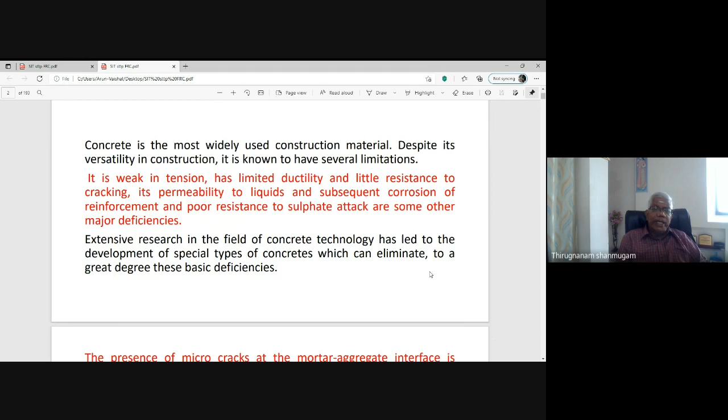So extensive research in the field of concrete technology has led to the development of special types of concretes which can eliminate to a great degree these basic deficiencies.

The presence of micro cracks at the mortar-aggregate interface is responsible for the inherent weakness of plain concrete. This weakness can be improved or arrested by the inclusion of fibers in the mix. The fibers help to transfer the loads at the internal micro cracks. Such a concrete is known as fiber reinforced concrete.

Thus, fiber reinforced concrete is a composite material essentially consisting of conventional concrete reinforced by fine fibers, either steel fiber or non-metallic fibers. The fibers suitable for reinforcing concrete have been produced from steel, glass, and organic polymers. Fibers are available in different sizes and shapes.

Fiber reinforced concrete is a two-phase composite material in which a cement-based matrix is reinforced with an ordered or random distribution of fibers. Regarding the orientation of fibers, they may be orderly distributed or randomly distributed. If orderly distributed, there is a special name for the fiber reinforced concrete, such as SIFCON, SIMCON, etc. If randomly distributed, it is given the general name fiber reinforced concrete.

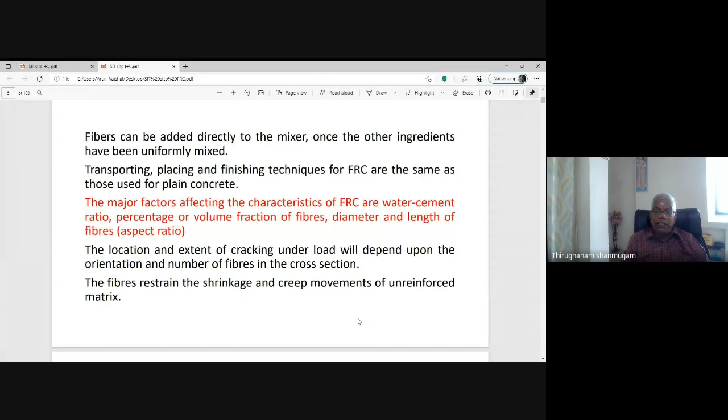The location and the extent of cracking under load will depend upon the orientation and number of fibers in the cross section. The fibers restrain the shrinkage and creep movements of the unreinforced matrix.

Polypropylene fibers and glass fibers are synthetic fibers, or non-metallic fibers.

In contrast to reinforcing bars in RCC, reinforced concrete, which are continuous and carefully placed in the structure to optimize their performance, the fibers are discontinuous and are generally randomly distributed throughout the matrix. As a result, the reinforcing performance of steel fiber is inferior to that of reinforcing bar.

Just think about this point. The reinforcing bars are continuous bars; that is, the reinforcement is continuous over a length of about 2 meters or 4 meters, depending upon the length of the member. It is carefully placed in the structure in the tension zone. Normally, the steel reinforcement is used to take care of the tensile stresses, so wherever tensile stresses are occurring, you have to place the steel reinforcement.

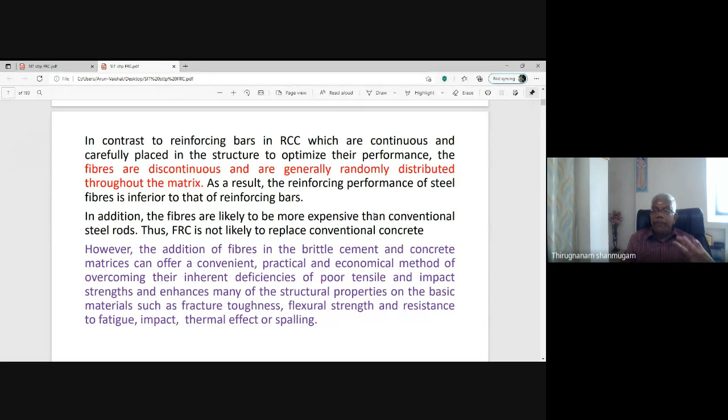However, the addition of fibers in the brittle cement and concrete matrices can offer a convenient, practical, and economical method of overcoming their inherent deficiencies of poor tensile and poor impact strength, and enhances many structural properties of the basic material such as fracture toughness, flexural strength, resistance to fatigue, resistance to impact, and resistance to thermal stresses or spalling of the concrete. These are the properties to be improved by means of the inclusion of fibers.

Essentially, fibers act as a crack arrestor, restricting the development of cracks, thus transforming an inherently brittle matrix, that is cement, with its low tensile strength and low impact strength, into a strong composite with superior crack resistance, improved ductility, and distinctive post-cracking behavior prior to failure.

When you examine the behavior of FRC beams and compare it with the behavior of RCC beams, the distinction is that the post-cracking behavior of the fiber-reinforced concrete beam is significantly different from the behavior of the RCC beam.

Steel fibers are probably best suited for structural application, due to superior properties like increased tensile and bending strength, improved ductility, resistance to cracking, high impact strength and toughness, and high energy absorption capacity. This fiber-reinforced concrete has found special applications in hydraulic structures, pavements, bridge decks, heavy-duty floors, and tunnel linings, etc.

Because of superior properties like improved ductility, improved resistance to cracking, high impact strength, high toughness, and high energy absorption capacity, this fiber-reinforced concrete has found special application in hydraulic structures, pavements, bridge decks, heavy-duty floors, tunnel linings, and structural elements subjected to seismic behavior.

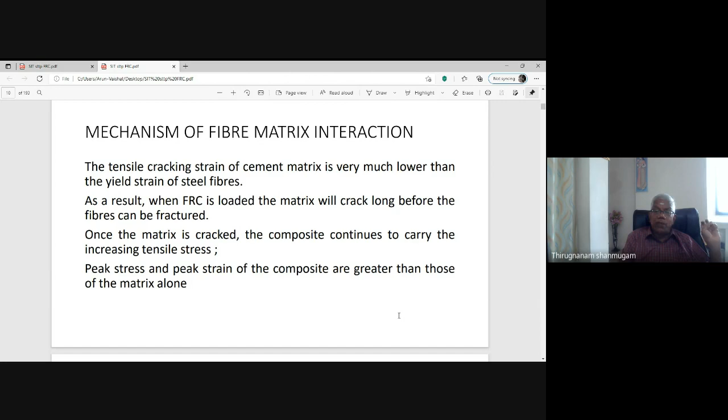The fibers are able to carry the tensile stresses, so the composite material continues to carry the increasing tensile stresses. The peak stress and peak strain of the composite are greater than those of the matrix alone. During the inelastic range between the first cracking and the peak,

multiple cracking of the matrix occurs. This is a significant behavior of fiber-reinforced concrete. There are a number of cracks developed in the load deflection curves. Because of these cracks, the load deflection curves exhibit multiple cracking mechanisms.

So until the initial cracking of the matrix, it is reasonable to assume that both the fibers and the matrix behave elastically and there is no slippage between the fibers and the matrix. Just like conventional reinforced concrete, we assume that the steel reinforcement is fully bonded with the cement concrete until the slippage occurs. Until then, this behavior is elastic behavior, and you can apply your strength of materials theory.

Once slipping occurs, all the tensile stresses from the cement concrete are transferred to the steel reinforcement. So the cement concrete is cracked in the tension phase and the tensile stresses are taken by the steel reinforcement. That is the behavior of RCC beams.

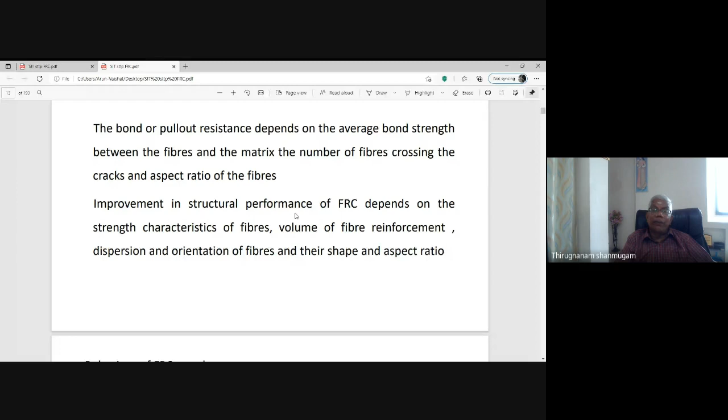Behavior of fiber reinforced concrete members: in an FRC member subjected to flexure, the load at the first crack will increase due to the crack arresting mechanism of the closely spaced fibers. After the concrete cracks in tension, the fibers continue to take the load, provided the bond is good.

When the fiber strain reaches its breaking strain, the fiber fractures, resulting in load transfer to the fibers of adjacent layers, which on reaching the breaking strain also fracture, resulting in shifting of the neutral axis. Fibers nearer to the tension face of the beam reach the failure strain first, and this extra strain is transferred to the fiber next to the surface fiber, that is, the interior fiber, causing the shifting of the neutral axis.

You can notice this behavior in the under-reinforced concrete beam. There are three types of behavior: balanced beam, under-reinforced, and over-reinforced. In a balanced beam, the critical neutral axis is at one point.

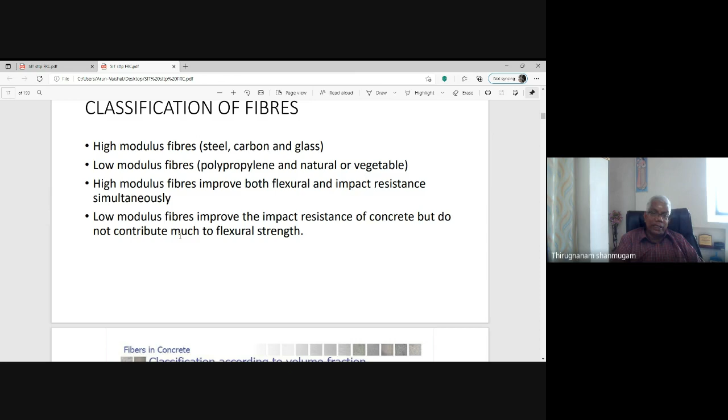Another classification is according to volume fraction: low, moderate, and high volume fraction. If the volume fraction is less than 1%, it is called low volume fraction. If greater than 2%, it is high volume fraction; in between is moderate volume fraction.

Low volume fraction means the fibers are used to reduce shrinkage stresses and shrinkage cracking. These fibers are used on surfaces of slabs and pavements that have large exposed surface area, leading to high shrinkage cracks. So the primary purpose of low volume fraction is to arrest shrinkage cracks developed on large exposed surfaces, such as roof slabs or pavements.

The dispersed fibers offer various advantages over steel bars and wire mesh for reducing shrinkage cracks. The fibers are uniformly distributed in 3 dimensions, X, Y, Z, making an efficient load distribution. The fibers are less sensitive to corrosion than reinforcing steel bars. A steel bar is continuous in length, so once corrosion takes place it continues over the entire length of the bar. But these fibers are randomly distributed within the cement matrix, so they are less sensitive to corrosion since continuity action will not be there. The fibers can also reduce the labor cost of placing bars and wire mesh.

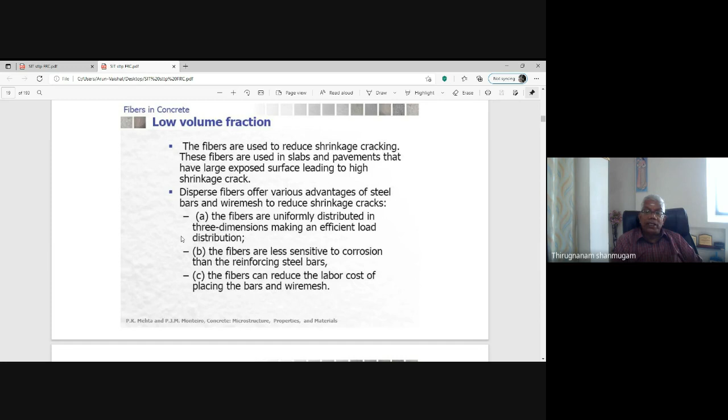Moderate volume fraction: the presence of fibers at this volume fraction increases the modulus of rupture, fracture toughness, and impact resistance. These composites are used in construction methods such as shotcrete, fiber shotcrete, and in structures that require energy absorption capability, improved capacity against delamination, spalling, and fatigue. So moderate volume fraction of steel fibers or other fibers can be applied as fiber shotcrete, used in lining of tunnels, etc.

Similarly, this moderate volume fraction is used in structures that require flexural behavior or seismic behavior, which demands ductility and energy absorption capacity, and improved capacity against delamination in aggressive environments, spalling of concrete, and fatigue strength, which is subjected to reversal of stresses.

High volume fraction: the fibers used at this level lead to strain hardening of the composite. Because of this improved behavior, these composites are often referred to as high performance fiber reinforced concrete, HPFRC. In the last decade, even better composites have been developed, referred to as ultra high performance fiber reinforced concrete, UHPFRC. Current research is focused on this high performance fiber reinforced concrete, normally high performance concrete, HPC.

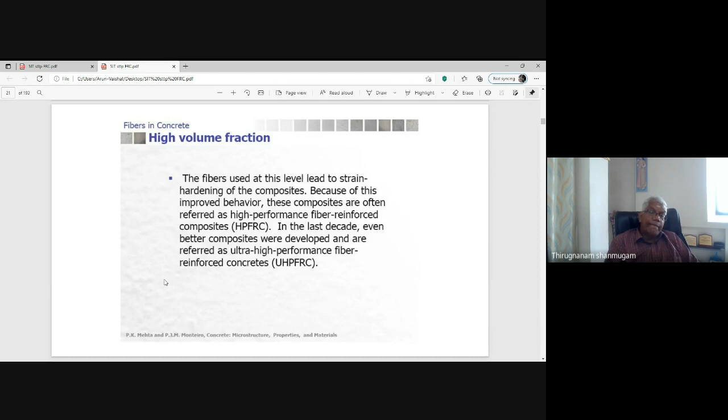This HPC is a brittle material. Because of the higher strength, sudden explosive failure takes place. So in order to convert this failure into a ductile failure, fibers are added inside the concrete. This resulting concrete is called high performance fiber reinforced concrete, which is applied in all field applications.

Mechanism: the composites carry increasing loads after the first cracking of the matrix. If the pull-out resistance of the fibers at the first crack is greater than the load at first cracking, then at the cracked section the matrix does not resist any tension, and the fibers carry the entire load taken by the composite. With increasing load, the fibers transfer additional stresses to the matrix through bond stresses. This process of multiple cracking continues until either failure occurs or accumulated local debonding leads to fiber pullout - either fiber pullout or fiber failure. Until then, the multiple cracking mechanism occurs and load carrying capacity increases.

According to a report by ACI committee, the total energy absorbed in fiber debonding, as measured by the area under the load deflection diagram before complete separation, is at least 10 to 40 times higher for fiber reinforced concrete than for plain concrete - a minimum of 10 times increase in energy absorption capacity for fiber reinforced concrete.

The magnitude of improvement in toughness is strongly influenced by fiber concentration and resistance of fibers to pull out, along with other factors such as shape or surface factor. So the magnitude of improvement in toughness is strongly influenced by fiber concentration, or the volume fraction of fibers, and similarly by resistance to pull out, which relates to bond stress.

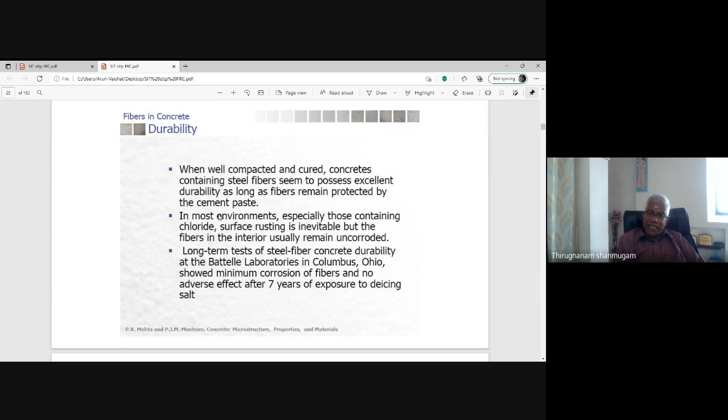Long-term tests of steel fiber reinforced concrete showed minimum corrosion of fibers and no adverse effect after 7 years of exposure to de-icing salt. So after 7 years of exposure to severe environments, there will not be any significant corrosion or deterioration of the concrete. Fiber reinforced concrete is highly durable.

Considering glass fiber, ordinary glass fiber cannot be used in Portland cement mortars or concrete because of chemical attack by the alkaline cement paste. The pH value of the cement paste is around 13. This alkaline nature affects the siliceous nature of the glass fiber, a chemical reaction takes place, and finally the fibers vanish. So you should not use ordinary glass fiber.

But zirconia and other alkali-resistant glass fibers possess better durability to alkaline environments, though even these are reported to show gradual deterioration with time, after 5 or 6 years. Initially there is no deterioration because of the alkali-resistant glass fibers, but at a later stage, after 5 or 6 years, there will be gradual deterioration.

Similarly, most natural fibers such as cotton, wool, coir, jute or other vegetable fibers, and many synthetic polymer fibers like polyester or polypropylene, suffer from lack of durability in the alkaline environment of the Portland cement paste. So for improving the durability of fiber reinforced concrete, you should not use natural or synthetic fibers which decompose over time.

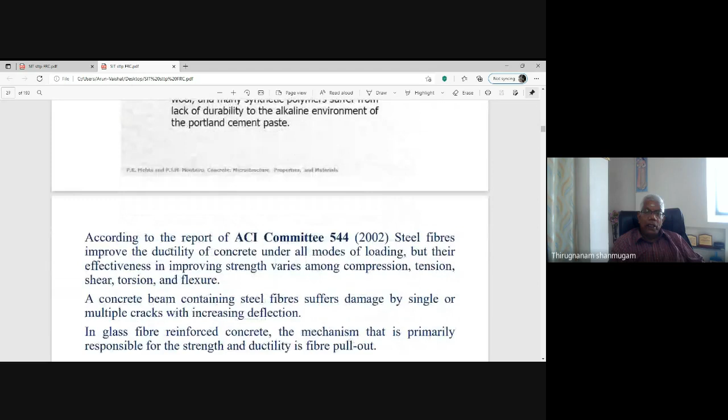According to the report of ACI Committee 544, steel fibers improve the ductility of concrete under all modes of loading, but their effectiveness in improving strength varies among compression, tension, shear, torsion, and flexure. This is an important conclusion reported by the ACI committee. The improvement of ductility, demanded by seismic behavior of structures or wind behavior under cyclones or hurricanes, requires going for steel fibers.

But their effectiveness in improving compressive strength, tensile strength, shear strength, torsional strength, or flexural strength is very low compared to the ductility improvement. Even if ductility improvement is 100%, the improvement in strength is only 25 to 30%.

A concrete beam containing steel fibers suffers damage by single or multiple cracks with increasing deflection. So this FRC beam suffers a multiple cracking mechanism and the deflection increases.

In glass fiber reinforced concrete, the mechanism primarily responsible for the strength and ductility is fiber pullout. The glass fiber surface is smooth, so the failure mechanism is due to fiber pullout, which is primarily responsible for the strength and ductility.

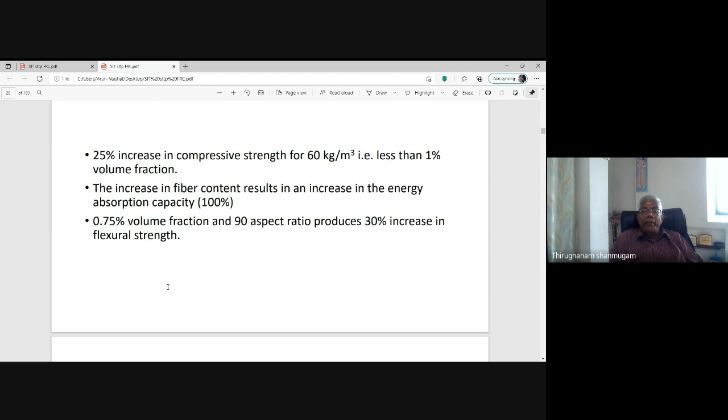A 0.75% volume fraction and 90 aspect ratio of the fiber produces a 30% increase in flexural strength. Normally in fiber reinforced concrete, the volume fraction of steel fiber is limited to 1%, which is the optimum. You need not provide 1.5 or 2% fibers because it will not contribute to improvement in strength and durability properties.

Advantages of fiber reinforced concrete.

Steel fibers result in a more homogeneous mix in concrete. Flexural strain capacity is enhanced. It adds ductility to concrete, controls cracks, and provides joint stability. Narrow joint width is possible. There is a shear load transfer mechanism. Fatigue and impact resistance is high, and there is post-crack ductility behavior. Once cracking occurs, ductility increases very much, beyond 100%, 200%, 300%, because of large deformation. Ductility is defined as the ability of a concrete member to undergo inelastic deformation while sustaining the load, and inelastic deformation is much higher in fiber reinforced concrete.

It reduces material consumption, saves cost, and gives longer service life.

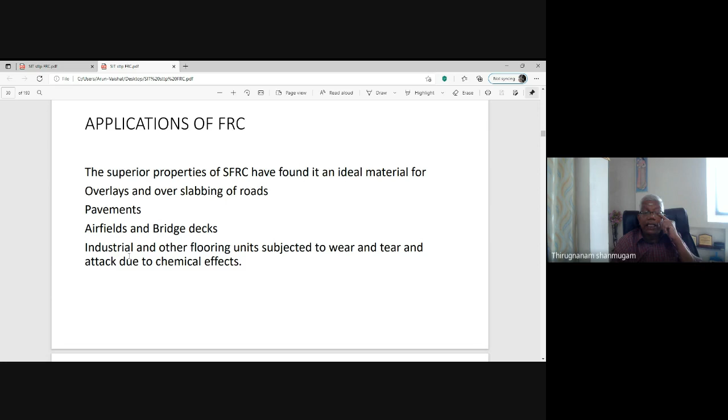For industrial and other flooring units, you need not provide steel fibers. Recron 3S fibers or other polymeric fibers are sufficient to improve resistance against wear and tear, abrasion, and chemical attack.

Applications of steel fiber reinforced concrete include highway and airfield pavements, hydraulic structures, tunnel lining, industrial floors, bridge decks, refractory concrete, precast applications, structural applications, etc.

In hydraulic structures, the major advantage of using FRC is its resistance to cavitation or erosion damage caused by high velocity water flow. In the spillway and stilling basin of a dam, fiber reinforced concrete can be used instead of ordinary conventional concrete, because of the impact and abrasion action of water flowing at high velocity. Resistance to cavitation and erosion is achieved only with these fibers.

SFRC has been successfully used in the repair of the stilling basin at Tarbela Dam in Pakistan. Nowadays, in all dams, we are using only SFRC concrete.

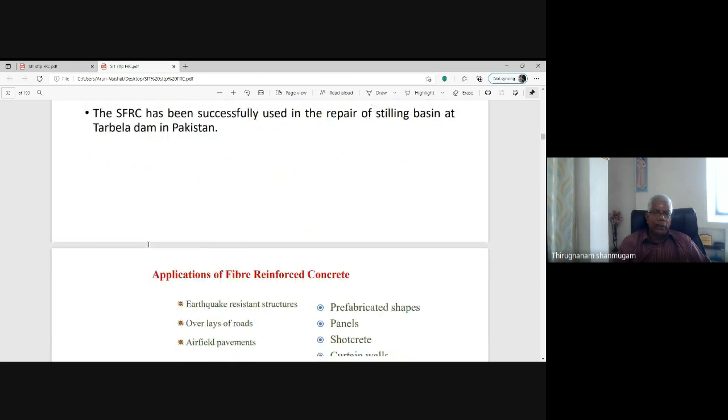To summarize the applications: earthquake resistant structures, overlays of roads, airfield pavements, bridge decks, thin sheets, pipes, composite decks, prefabricated shapes, panels, shotcrete and fiber shotcreting, curtain walls, slabs on grade, precast elements, walls, safe walls, impact resisting structures, etc.

Another type of fiber reinforced concrete, developed beyond 2000, is called ductile fiber reinforced cementitious composite (DFRCC). DFRCC is a broader class of materials with properties and superior performance characteristics compared to conventional cementitious materials such as concrete and FRC. These have unique properties including damage reduction, damage tolerance, energy absorption, crack distribution, deformation capability, and delamination resistance. Because of these improvements, it is named ductile fiber reinforced concrete.

Ultra high performance concrete is a high strength, high stiffness, self-consolidating and ductile material formulated by combining Portland cement, silica fume, quartz flour, fine silica sand, high range water reducer, water, and steel or organic fibers.

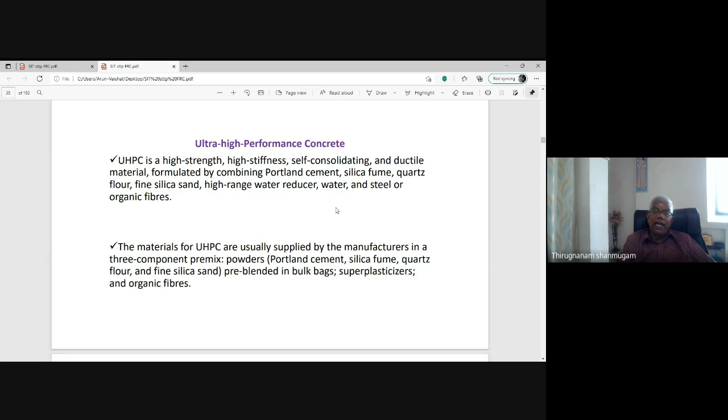The materials for UHPC, ultra high performance concrete, are usually supplied by manufacturers in a 3-component premix: powders, superplasticizer and organic fibers.

This powder is composed of Portland cement, silica fume, quartz powder and fine silica sand. This is a fine powder where cement and fine aggregates are pre-blended in bulk bags, that is, cement mortar. Cement mortar is available in bulk bags of 25 kg, 40 kg, etc.

In this powder, some siliceous materials and cementitious materials are used. That is, quartz powder is the siliceous material, silica fume or microsilica is the cementitious material, and fine silica sand is the silica material, added to improve the properties or durability of the concrete. Superplasticizers are added, second, to improve workability, and steel or organic fibers are added to induce ductility.

So the fabrication or casting is easy. You just mix the powder with the required amount of water and superplasticizer, and the fibers are randomly distributed over this matrix. This produces the ultra high performance concrete.

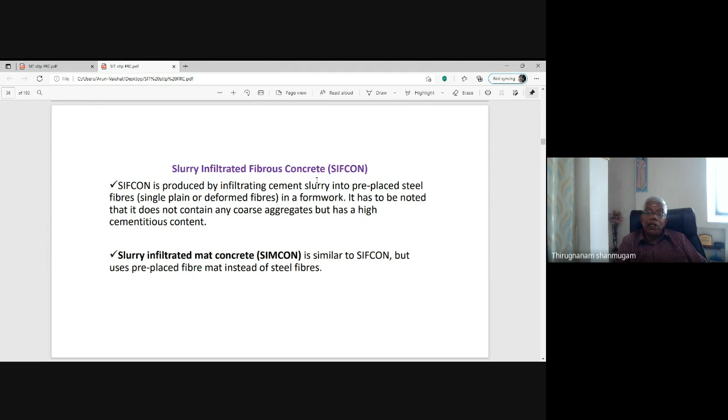Then slurry is poured over the pre-packed fiber mat, and the resulting product is SIMCON. The performance of this variant is superior compared to regular Sifcon.

The steel fibers are pre-placed in the mold to its full capacity, thus forming a fiber network. This fiber network is then infiltrated by cement-based slurry. Due to this method of fabrication, the volume fraction of fibers can be very high, ranging from 4 to 20%.

Normally, 10% volume fraction is adopted easily. Beyond that, the flowability of the slurry becomes very thin, and you have to add superplasticizer along with viscosity modifying agents, etc. So for normal purposes, 8% or 10% volume fraction is sufficient.

This is a function of several parameters, including size, shape, aspect ratio, orientation, method of packing, and extent of vibration, etc.

Sifcon is made by pre-placing steel fibers followed by infiltration of a dense cement-based slurry. Since fiber orientation cannot be controlled, a much higher volume fraction is necessary to achieve similar behavior. The mat variant is manufactured by pre-placing continuous fiber mats followed by infiltration of cement-based slurry.

In comparison, the fiber mats are pre-woven and delivered to the site in large rolls. The mats need only to be cut and unfurled into the formwork.

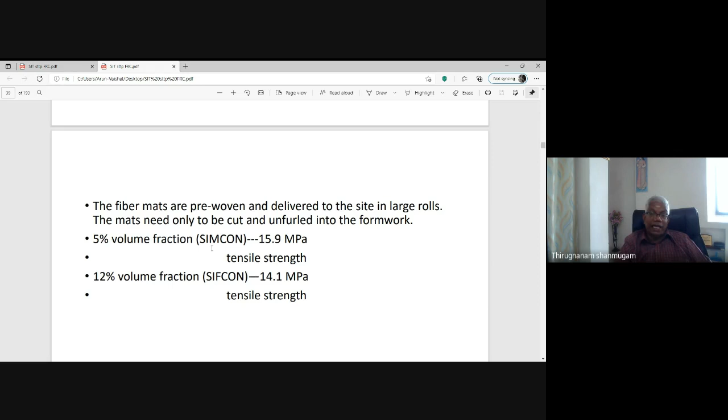Whereas you need 12%, more than twice the volume fraction, in the Sifcon casting technique. So if the steel fiber mat is available, you can go for this variant instead. There is a very good research opportunity in studying Sifcon material.

SIFCON beams reinforced with mild steel bar reinforcement have much more flexural strength and flexural toughness than conventional RCC. The steel fibers or any other fibers act only as secondary reinforcement; the primary reinforcement is the regular steel reinforcement, the mild steel bars or cross steel bars. SIFCON beam-column connections absorb much more energy and sustain much higher loads compared to normal concrete.

The typical properties of SIFCON, as per literature: the unit weight of SIFCON is similar to that of concrete, but there is a slight variation depending upon the volume fraction of fibers. If the volume fraction is about 4%, it is around 21 kilonewton per meter cube because it contains no coarse aggregate, so there's a slight decrease in unit weight. But if the volume fraction is 10, 12, or 14%, it produces higher density, about 32 kilonewton per meter cube, because steel has higher unit weight. So the unit weight of SIFCON concrete is approximately 25 kilonewton per meter cube, similar to RCC.

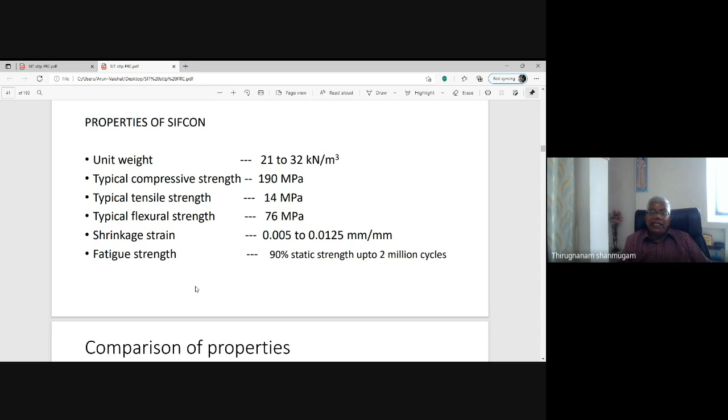There is a large amount of flexural tensile strength. Shrinkage strain is very, very low, and fatigue strength is very high, 90% of static strength up to 2 million cycles.

In laboratory investigation, a comparison was made. At IRTT we conducted the experiment during 1998 as part of a BE project. The cube strength for normal concrete is 32 Newton per mm square, and 37 or 38 Newton per mm square for fiber reinforced concrete, about a 10% increase in compressive strength. For SIFCON, values are about 46 or 50 Newton per mm square, so the contribution of fiber in SIFCON compressive strength, whether cube or cylinder compressive strength, is about a 25% increase. Cylinder compressive strength values are 27, 31, 35.

Comparing split tensile strength: 2.6 for normal concrete, 3.8 for fiber reinforced concrete, about a 30% increase, and 7.6 for SIFCON, about 3 times more. The flexural strength and direct tensile strength contribution is about 3 times. Flexural strength is 4.5 Newton per mm square for normal concrete, 5.9 for fiber reinforced concrete, a significant increase of about 10-20%, but SIFCON shows about 10 times increase.

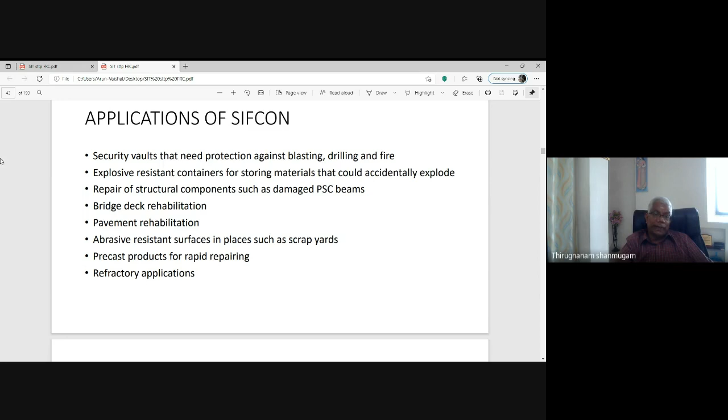This element is fabricated because of Professor Dr. P. Paramasivam in National University of Singapore. Experimental investigation of RC frames with SIFCON beam column joints - that is my PhD work.

A 2 bay 5 story frame. This is the model, it is a reinforcement grill. This reinforcement grill is designed according to IS 456 and detailed according to IS 13920 detail for earthquake resistant structures.

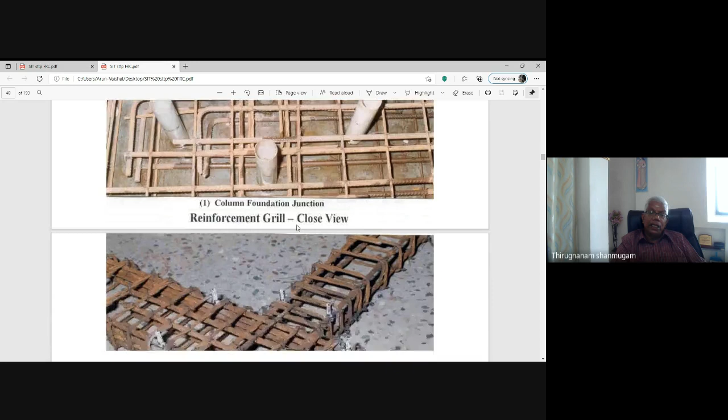There is a close-up view of the reinforcement. The column reinforcement is taken into the foundation. The beam reinforcement is taken into the columns, satisfying the development length criteria, LD plus 10 times the diameter. The top bar of the beam is taken inside, and the bottom bar of the beam is taken on the upside of the column, giving anchorage to the steel reinforcement, satisfying IS 13920 detail.

This reinforcement grill is provided with attachments. A steel stud is fixed to the reinforcement for measuring steel strain, tensile strain or compressive strain in the steel reinforcement. In order to protect the steel studs from binding of the cement matrix, free expansion is needed, so it is covered with flexible material, hose pipes, rubber tubes.

The steel fibers are round steel fibers. We are producing these steel fibers using a cutting machine, cutting them into rectangular lengths, 5 centimeter fibers. These are the binding wires, stainless steel wires having a diameter of about 0.5 mm, available in rods, binding wires.

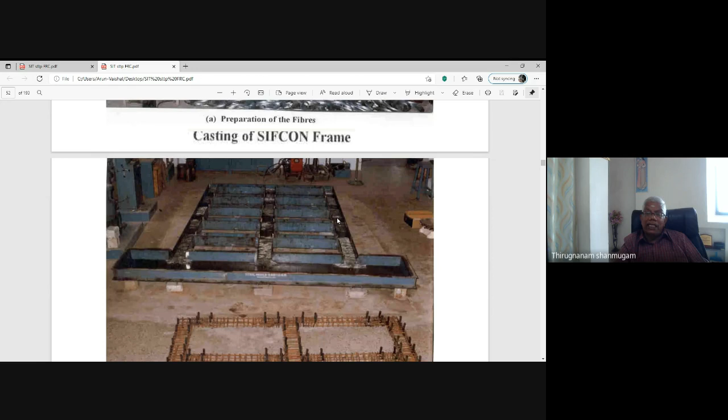Casting of the SIFCON frame: first the frame mold assembly is set up. The cover concrete is done with the SIFCON material, pre-packing of the fiber bed to make the cover concrete. This fiber bed is inside the foundation also. The bottom column is completely made with SIFCON material, and the other portion is only at the junction, the beam column junction.

The reinforcement is taken and placed over the cover concrete. Once the reinforcement is placed in the mold, steel fibers are randomly distributed in between the gaps of the reinforcement, mainly on the stirrups and ties. The steel fiber packing is done carefully, with as much as 8% volume fraction of fiber occupied in this procedure.

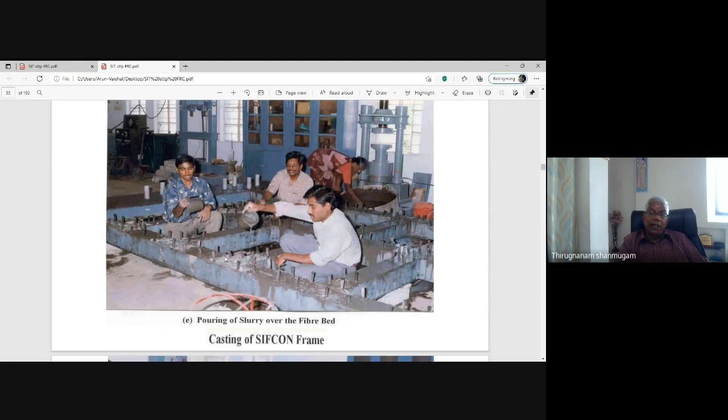Now the cement slurry is poured. The cement slurry is manufactured here - cement, fly-ash material, and fine sand material less than 300 micron size is made into a slurry liquid form, and this liquid is poured over the fiber bed to make the SIFCON concrete. In between this steel fiber bed SIFCON concrete, regular concrete, M20 concrete, is placed on the beams and columns, and this concrete is compacted by means of a needle vibrator.

This is our guide, Dr. P. Govindan from CIT. This laboratory is the structural engineering laboratory in CIT. These are our BE students at the time, helping me to do this experimental project.

After casting the specimen, curing is done as per normal practice. Because of the larger size of the frame, gunny bag curing is adopted, and these gunny bags are wetted frequently, three times a day. 20 days of curing is adopted.

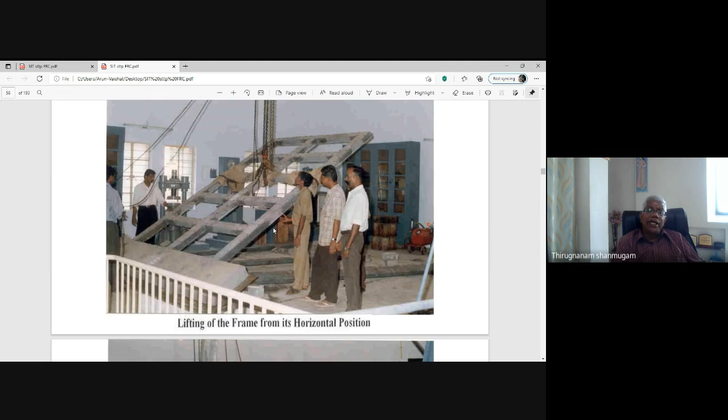After 20 days of curing, these frames are lifted up by means of electric overhead cranes, EOT cranes, and shifted to the testing platform, transported to the testing platform.

In this slit, the frame specimen is fitted and jointed to the foundation by means of bolts - there are 4 bolts for each column and in the middle portion. This precast foundation block is anchored to the strong floor by means of these bolts, so this is completely rigid.

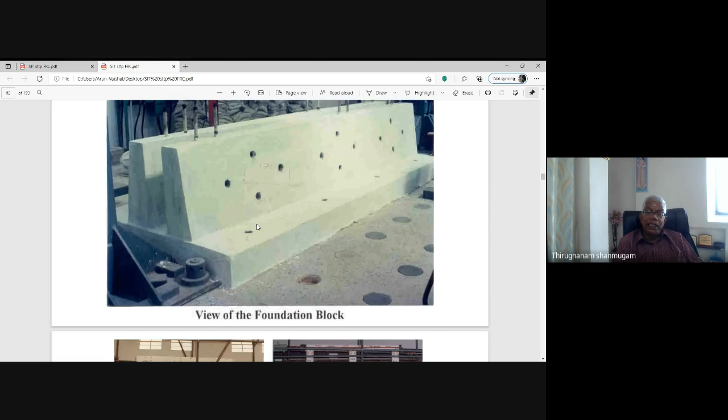This is the strong floor, and this precast foundation is strongly anchored to the foundation. Now the frame is transported to the site and lowered down inside the slit of the precast foundation. After complete inserting, steel rods, 50 mm diameter steel bolts, are provided for the fixity of the foundation.

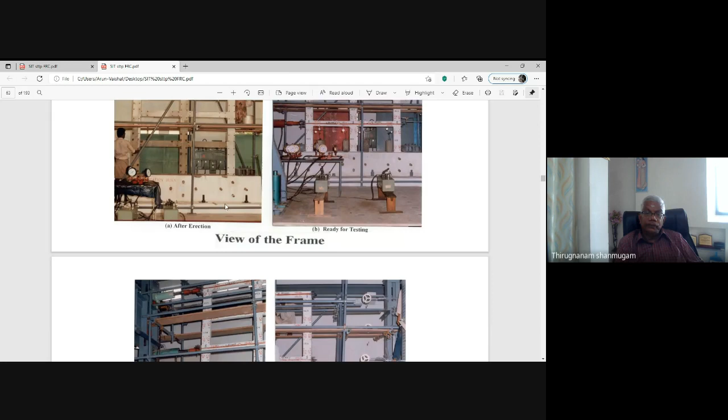You can notice the steel bolts, 50 mm diameter, for fixing the framed structure to the foundation. This is the view after fixing, but it was later whitewashed and marks were formed in order to facilitate the measurement of steel strain, compressive strain, and notifying cracks, etc. S means SIFCON frame, left beam, right beam, this beam 1, beam 2, beam 3, beam 4, beam 5, etc. Similarly column LC, left, middle column, and right column, 1, 2, 3, 4, 5, etc. These are to be notified in the surface painted marks on this surface.

Loading arrangements: hydraulic jacks, push-pull jacks or double-acting jacks are manufactured in Coimbatore itself, and these jacks are used for applying loads in both directions, positive x direction and negative x direction, push and pull. These attachments are used for applying the loads. The distance is made up by these attachments, coupler arrangements. And for acting the jack, hydraulic jack, the oil pump is here, and oil is distributed by means of the distributor. Simultaneously, these three jacks are acted together. The load is applied to these three jacks simultaneously, and the same load is observed for all: Load 1, P1, P2, P3, P1 equal to P2 equal to P3. That is the loading arrangement.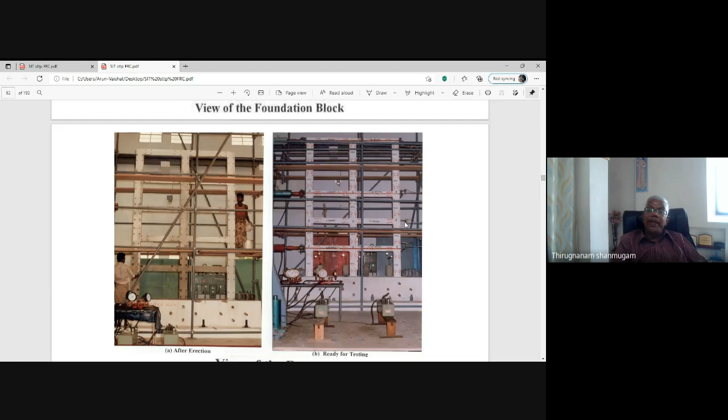In order to take measurements, we have prepared a platform over a certain interval because the total height is about 30 feet, and we cannot go up to the top. So over that we are preparing a scaffolding arrangement, and we can climb this scaffolding arrangement and take the measurements. For measuring the deflection, the initial deflection is measured by means of deflectometers, by means of LVDTs fixed at the points, story 1, top, 4th, 3rd, 2nd, 1st, etc. The lateral deflection is measured by LVDT, and once the deflection exceeds the limits of LVDT, normally 20 mm deflection can be measured by LVDT, and beyond 20 mm, we are fabricating one deflectometer like this, and these deflectometers are used for measuring the deflection.

What is the action of this deflectometer? An inextensible thread is connected at this point by means of pasting, and if the frame deflects, this wire tends to move and it moves over the spindle. A counterweight is located here. Because of the counterweight, it rotates the needle, and the reading contributes to the deflection. It is calibrated in such a way that 360-degree rotation means 360 mm. So that is the instrumentation arrangement.

Load sequence, seismic loading: we are calculating base shear as P1 plus P2 plus P3, the total base shear. It is applied at the bottom of the base, and top story deflection is measured. We are plotting only the top story deflection like this. The load deflection diagram is like this, that is a hysteretic diagram. And from this load deflection diagram, we are calculating the ductility factor as delta U by delta Y. For example, at the 31st cycle, delta 31 divided by delta Y contributes a ductility factor of 9.22.

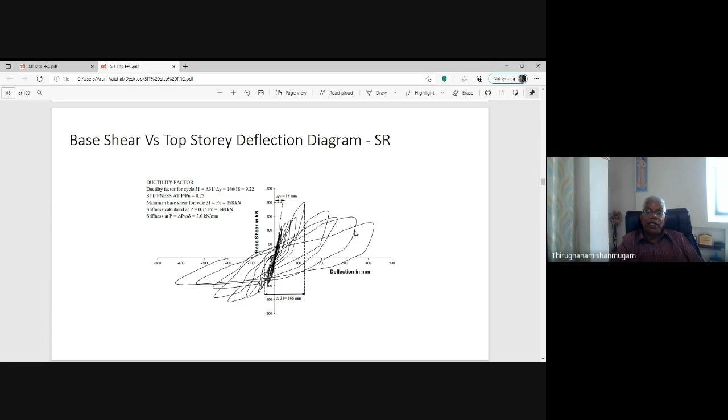And the stiffness is taken at a tangent drawn at PU by 0.75 PU level, P equal to 0.75 PU level. The slope of the tangent gives the stiffness values, and the maximum force is 198 kN at the level of the 31st cycle, and the stiffness calculated at 0.75 PU is 148 kN. So 148 kN is the other tangent, and the ratio calculated is 2 kN per mm. Stiffness required is 2 kN per mm. Initially the stiffness is higher and goes on increasing the loads in the elastic cycle of loading. The stiffness is gradually decreasing; that is called stiffness degradation.

Stiffness degradation is like this. Initially, the stiffness is 14 or 16, and finally gradually decreasing to a value of 1 or 2. There is no stiffness at all, and the frame is subject to failure.

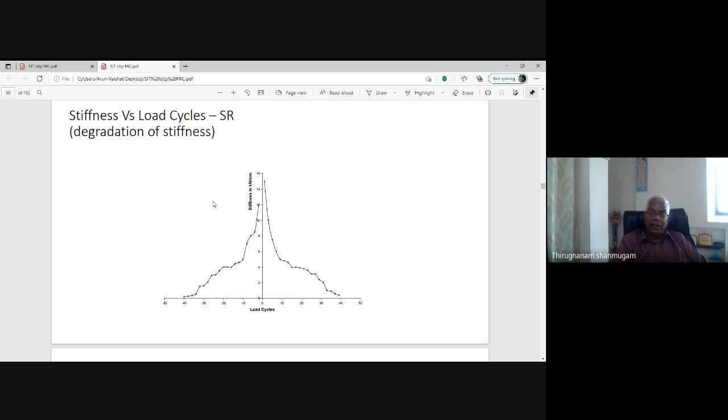Ductility is defined as the ability to undergo inelastic deflection while sustaining the load. The ductility factor is calculated as the deflection at any particular cycle divided by the deflection at yield. Yielded deflection is measured from the load deflection diagram by drawing a tangent at the first cycle, and at the ultimate point a horizontal tangent is drawn; the intersection point is taken as the yielded deflection, which is 18 mm for this particular frame. So delta U by delta Y gives the ductility factor: 166 by 18 equals 9.22.

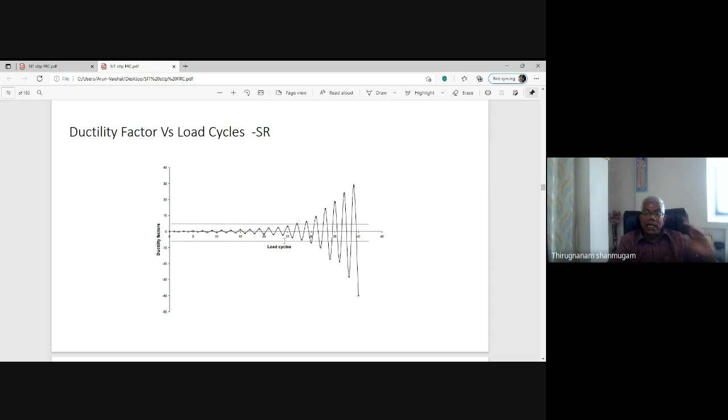This is how the ductility factor is calculated, and this is the variation of the ductility factor. Positive means forward loading, and negative means reverse loading. If all the ductility values are added together, forward and reverse, that gives the cumulative ductility. That is the variation of the cumulative ductility values.

At the beginning of the cycles, not much energy is absorbed because the frame is still in the elastic stage. Beyond that, all the plastic hinges are formed and the deflection is much higher, so the energy absorption capacity increases. Ultimately it leads to about 200 or 300 kilonewton mm as the total energy absorbed by the specimen.

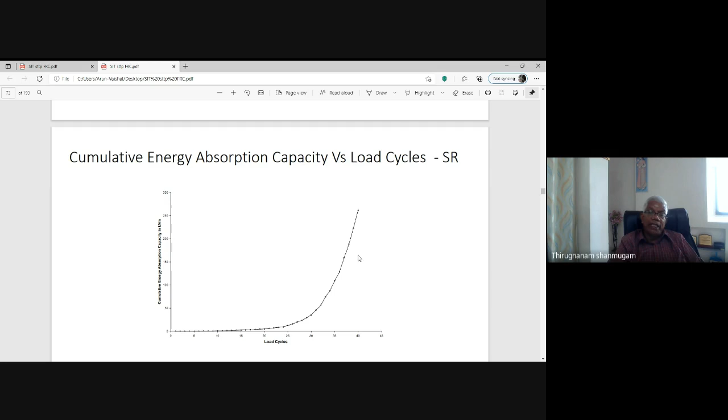This is Mrs. Umarani, current Professor of Civil Engineering at Anna University Structures Division, and our guide Dr. P. Govindan. This is myself. This frame is the RCC controlled frame, and this one is made with Sifcon material, the Sifcon frame. You can clearly notice the deflection pattern of this frame.

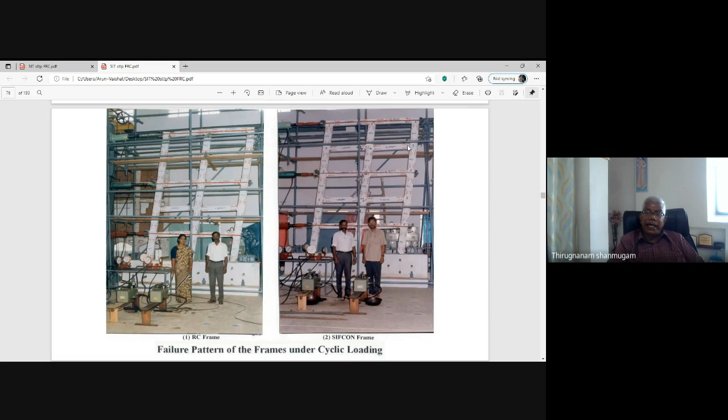The original pattern is like this. This is subjected to this amount of deflection, the yielded deflection, and then the inelastic stage deflection. That is our standing position, the vertical position of the column. Now this amount of displacement, about 300 or 400 mm, 40 centimeters, up to 700 mm deflection is also possible.

This happens because of joint failure; the shear strength required is very much higher. This shear strength demand is due to push-pull action. Concrete does not have enough shear strength or tensile strength, so the concrete gets built up and spalled off, exposing the reinforcement and the stirrups also. This is the failure pattern of the joints of the frame.

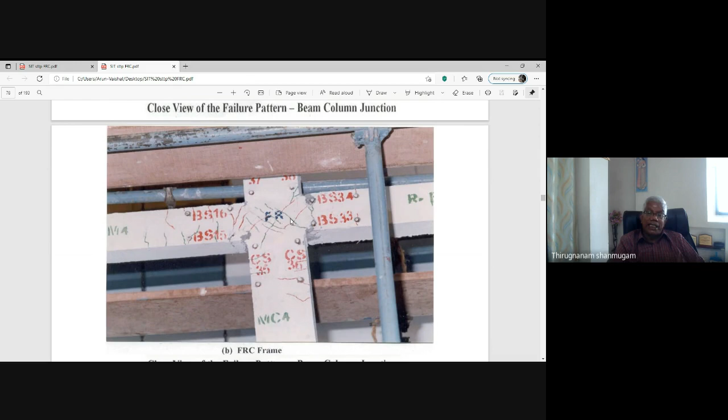Whereas in fiber reinforced concrete, this failure will not occur because although cracks develop, the fibers act as crack arrestors, preventing the cracks from widening and leading to spalling of the cover concrete. In Sifcon also, the same type of behavior is observed.

These patches are nothing but paintings; we have done white patching, so the actual color of the concrete is visible.

But these cracks are not widened, only hairline cracks, positive cracking and negative cracking, etc. This is the view of the columns, the failure of the column like this. The plastic hinge is formed.

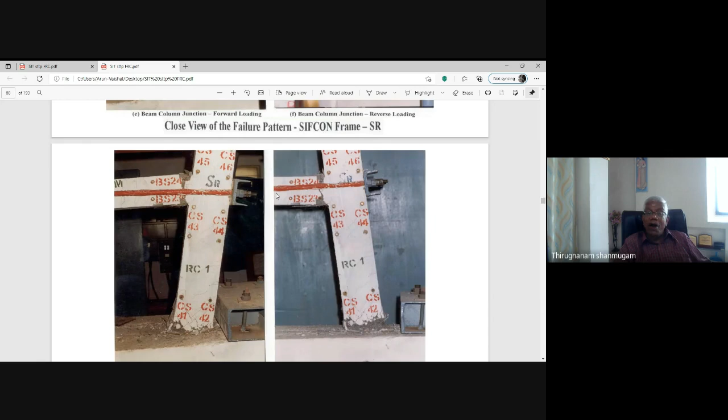This is the failure at the beam-column joints. A plastic hinge is developed at the beam-column joints. The beam has enough rotation, so this is a strong column, weak beam concept.

Based on this experimental investigation on multi-bay, multi-story RC frames with SIFCON beam column joints subjected to seismic type loading, the following conclusions are drawn.

The use of SIFCON in the hinging zones of beam column joints of RC frames subject to lateral static cyclic loading results in 100% increase in the first crack load, 100% increase in cumulative ductility, 100% increase in cumulative energy absorption capacity, whereas the ultimate load is increased only marginally, say 20%. Also, smaller crack widths and better resistance to damage.

The crack width is very small and the resistance to damage is superior, as seen in the pictures. The use of SIFCON in the beam column joints has resulted in better ductility and energy absorption. These qualities are desirable for structures located in wind or earthquake prone zones. That is the final conclusion.

I presented this paper at IIT Roorkee, and the expert committee of professors evaluating these results suggested to the Government of India that in seismic zone 5, if we adopt fiber reinforced concrete in the beam column joints, we will reduce the collapse of the structure. That is prevention of collapse in seismic design philosophy 3, moderate to severe earthquake. This can be easily achieved by means of fiber reinforced concrete.

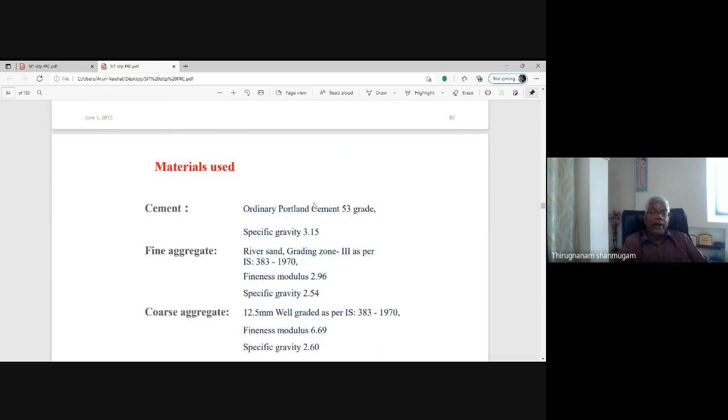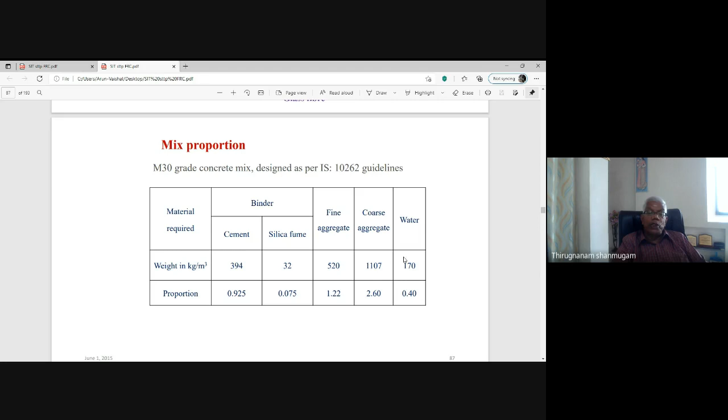Conventional concrete with fibers, and steel fiber concrete at volume fractions of 0.75, 1, 1.25, 1.5 - that is the variation of volume fraction. For the hybrid fiber reinforced concrete, we take the optimum proportion of 1 for all these.

The Recron 3S fibers and glass fibers are used in terms of percentage by weight of cement - 0.02, 0.03, etc. - very little quantity because the density is very low, so the number of fibers is huge. For steel fibers, the density is as much as 8 grams per centimeter cube, so the number of fibers is less. So we are equating these two as a fiber input.

The details of specimens: beam size 100 mm by 170 mm by 1500 mm, main reinforcement with two numbers of 10 mm diameter rods at both top and bottom, stirrups of 6 mm diameter at 100 mm centers. Column size, longitudinal reinforcement of 6 numbers of 8 mm diameter rods.

This is a model column and model beam, so the reinforcement diameter is very small, 8 mm or 10 mm. Lateral ties are 6 mm diameter at 100 mm spacing according to IS 13920 detailing for the beam column joint.

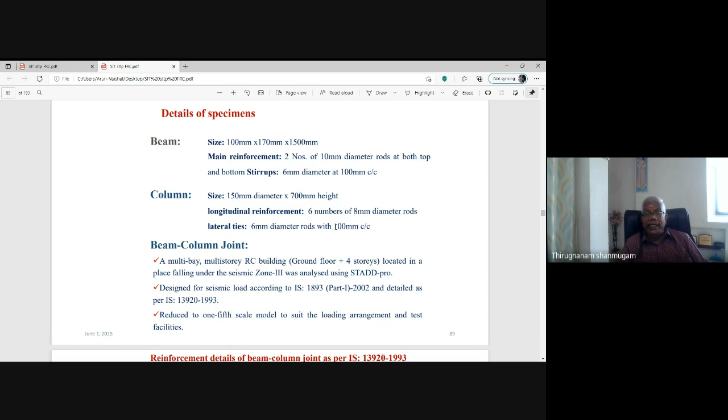The beam column joint is taken as a model of the prototype frame analyzed using STADD-pro software, and the model calculation is like this. This is the prototype of the actual building, and this is the 1/5 scale model.

We are taking the size of the beam, size of the column, and size of the beam column joint, etc. This is the reinforcement detail of the beam column joint: 120 by 170 mm dimension of the beam.

It consists of 3 numbers of 10 mm diameter bars at both top and bottom, because it is reversible loading applied cyclically. So both the tension and compression reinforcement are the same, with 6 mm diameter stirrups at 30 mm to 60 mm centers - 30 mm centers up to a depth of 2D, and longer spacing beyond that.

Similarly, up to a depth of 2D, the ties are placed at closer intervals, and beyond that, at longer intervals. The column reinforcement is 120 by 230 mm size, with 8 numbers of 8 mm diameter bars provided as longitudinal reinforcement, and 6 mm diameter ties at 30 to 60 mm centers.

Along with this beam column joint, component specimens - cubes, cylinders, prisms, etc. - have been cast and tested while testing the beam column joint.

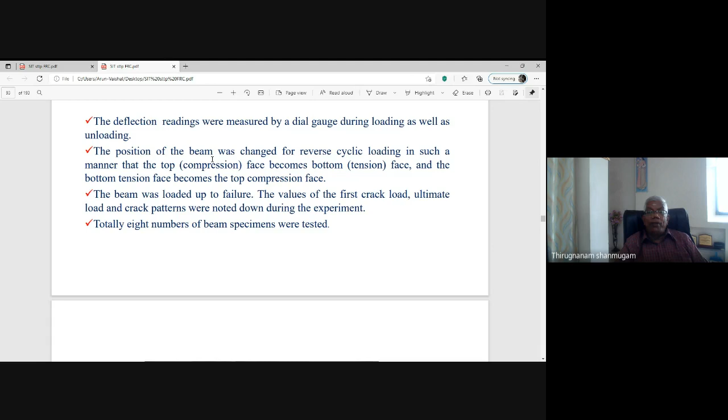So we changed the position of the beam - the top face becomes the bottom face, and the bottom face becomes the top face, like that. This is the experimental setup for the beam.

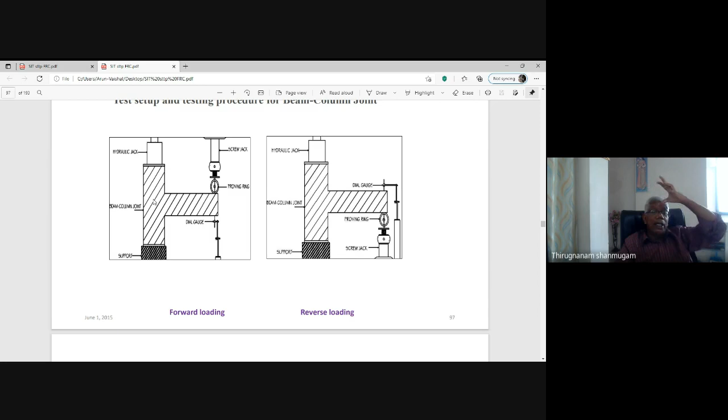This is the arrangement for beam column joints for forward loading and for reverse loading. This is a beam column joint, column portion. This column portion is fixed on the support, and for ensuring the fixity of the support, you can apply a load of about 10 or 100 kN, such as to ensure the total compressive strength of the compressive stress in the column, 0.1 FCKAC.

This is specified by IS 1893 code. For multi-story buildings, the column is subjected to normal axial pressure, and in order to simulate this axial load on the column, this load is applied. The beam portion is projecting, and we are applying the load at the end of the beam by means of a screw jack, and the proving ring is used for measuring. The deflection dial gauge is used for measuring the deflection.

Here the jack is used at the bottom face to lift the beam column in the reverse mode, and dial gauge is used for measuring the negative deflection.

The results are plotted like this. For conventional concrete, 45 Newton per mm square, even though it is designed for M30 grade, but we are obtaining, because of the high quality control, 45 Newton per mm square as the compressive strength for the conventional concrete, and 55 Newton per mm square for fiber reinforced concrete, 61 or 58 Newton per mm square for the hybrid fiber reinforced concrete.

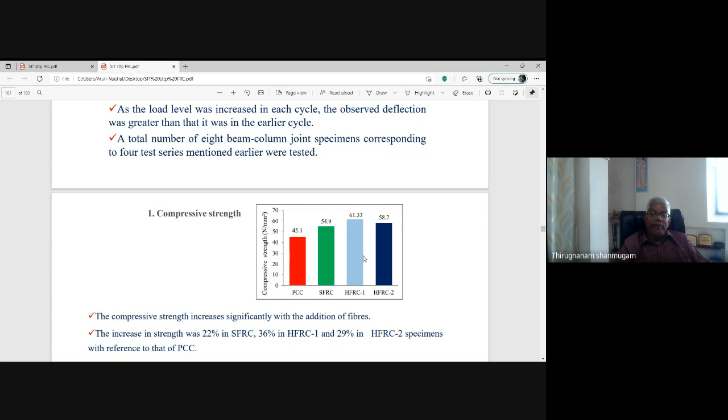Similarly, the split tensile strength is 2.8 Newton per mm square, 3.67 Newton per mm square, and 4.27, 3.73. This compressive and split tensile strength is improved very much, such as 30% or 40%, because of the inclusion of fibers. The fibers are acting as the crack arrestor. 30% increase in SFRC, 50% increase in HFRC.

Similarly for flexural tensile strength, the prism specimens are subjected to 2-point loading. We are estimating the flexural strength as PL by BD square: 4.7 Newton per mm square for PCC or control concrete, 5.9 Newton per mm square for fiber reinforced concrete, and 6.7 Newton per mm square for hybrid fiber reinforced concrete.

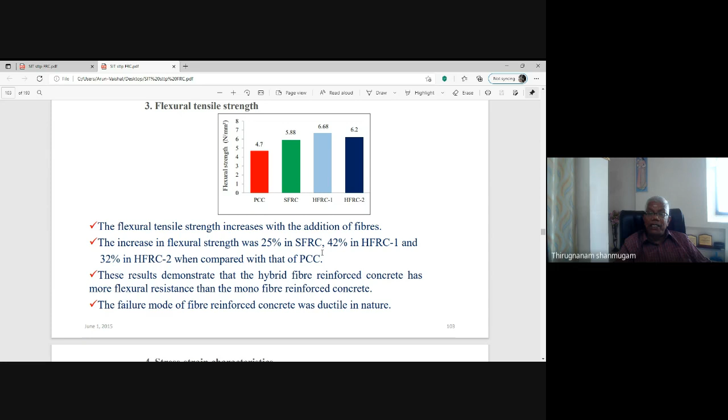A 25% or 30% increase is observed. As per the literature also, a 30% increase in flexural strength is obtained by using 0.75% volume fraction of fibers. Similarly here also.

The cylinder specimens are subjected to the stress strain behavior test using the compressiometer. We are plotting the stress and strain, that is the stress strain behavior. From this stress strain diagram, we are estimating the modulus of elasticity, the initial tangent modulus, and the value is like this. There is a slight increase in modulus of elasticity.

The mode of failure: this is a conventional prism splitting into two pieces, but here there is no splitting action, only the crack is produced. Similarly, in the splitting tensile test, a vertical crack is developed in ordinary concrete, but here there is no vertical crack, only hairline cracks are available.

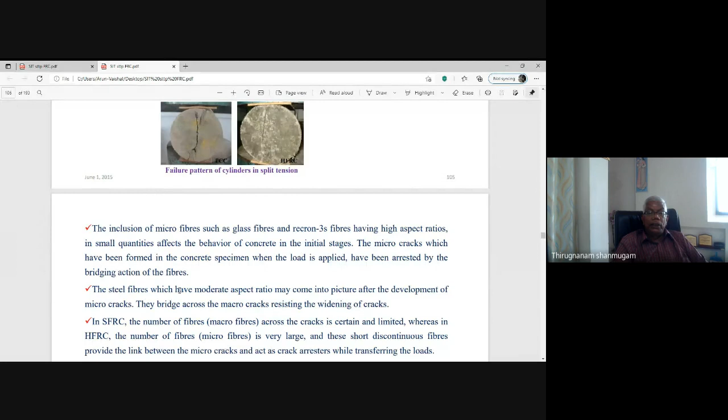These are the conclusions. In SFRC, the number of macrofibers across the cracks is certain and limited, whereas in HFRC, the number of microfibers is very large, and these discontinuous fibers provide the link between the microcracks and act as crack arrestors, transferring the loads. That is why the improvement in properties is noted.

When the fibers are combined in the form of hybrid, the onset of cracks may be delayed, resulting in a significant load differential. However, this effect is only marginal at ultimate load stages. Only the steel fiber plays the role of FRC and transfers all the loads.

Similarly, this hybrid fiber reinforced concrete specimen is subjected to a durability test, RCPT test, chloride RCPT test. That is the cylinder, NaOH solution and NaCl, on a 52 mm thickness specimen. The electrode is placed and 60 volt current is passed. Every 30 minutes, the Coulomb readings are taken and the total charge passed is calculated, and we obtain the results.

If the chloride ion penetrability value is greater than 4000, high penetrability is possible, and if it is less than 100, it is negligible. But here, because of good quality control, all the concrete specimens exhibit only low values.

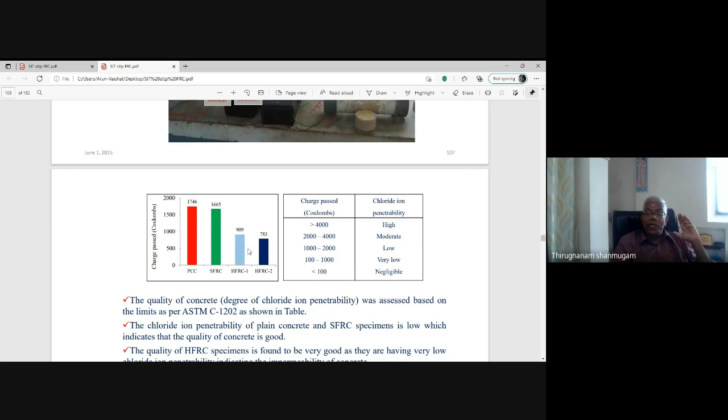Hence, the presence of hybrid fibers in concrete improves the chloride permeability resistance when compared to that with the presence of steel fiber alone. For beam behavior under reverse cyclic loading, the loading sequence and load deflection diagrams, hysteretic load deflection diagrams are studied.

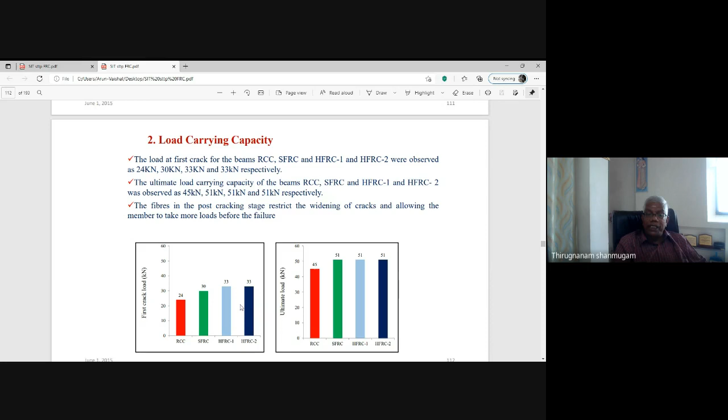So the load carrying capacity increases; first crack load is very much increased, 24, 30, 33, 33, etc. And the ultimate load is slightly increased, 45 to 51, 51, 51, etc., because the fibers do not contribute much to the ultimate load characteristic, only to the first crack load.

The cumulative ductility factor is also improved: 16 for the plain concrete RCC beam, 28 for SFRC, and 30 for HFRC. So the energy absorption capacity is 80% higher than that of the conventional concrete beam.

Similarly, the energy absorption capacity, which is the area under the load deflection diagrams summed cumulatively, produces values like 700, 1200 - nearly 80% increase - but here 1900 or 1800, about 2.6 to 2.7 times increase. So the energy absorption capacity is very much higher.

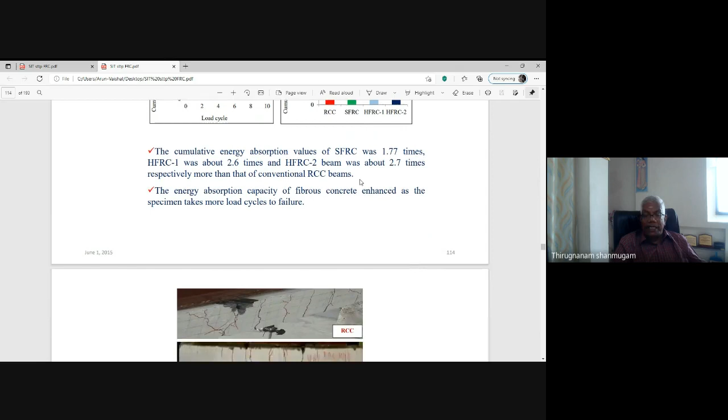Fibrous concrete specimens take many more load cycles to failure, so it is suitable for earthquake resistant structures and wherever reversible stresses are prevalent. That is the failure pattern of the beams, all the beams.

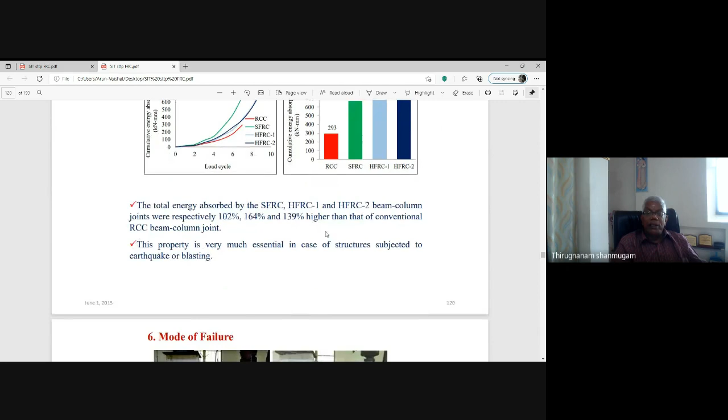Similar testing is done on beam-column joints, examining the load deflection behavior. The load carrying capacity is 18, 24, 27, 39 kN. The cumulative ductility factor is 11, 20, 23, 21, etc. Similarly, energy absorption capacity is 293, 666, 769, etc., about 100% increase.

The mode of failure is also variable. For RCC, sudden failure of the beam-column joint is possible because a plastic hinge forms at the beam-column junction and the beam fails. But here, instead of single cracks, a series of hair cracks are visible throughout the beam length, taking more load to develop the full plastic hinge mechanism. For HFRC also there is a series of flexural cracks, but the ultimate failure is similar to SFRC.

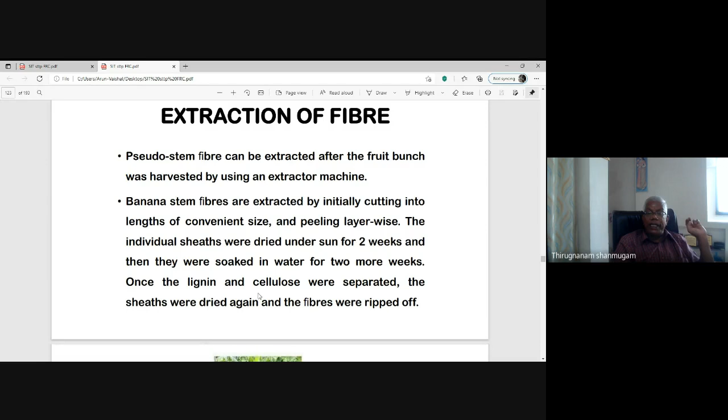Another investigation uses natural and vegetable fibers, such as banana fibers. Pseudostem fiber can be extracted after the fruit bunch is harvested, using an extractor machine. Banana stem fibers are extracted by cutting into convenient lengths and peeling layer by layer. The individual sheaths were dried under the sun for 2 weeks, then soaked in water for 2 weeks. Once the lignin and cellulose were separated, the sheaths were dried again and the fibers were extracted - that is the sequential operation.

This is the threading machine, and this is the view of the fibers. Banana fibers are nowadays used as a replacement for textile fibers like cotton. Cotton fibers are mixed with banana or other vegetable fibers to manufacture eco-friendly cloths, which have much demand in foreign countries, European countries. That is why banana fibers and sisal fibers are freely available in the Tirupur area, where textile industries are very prominent.

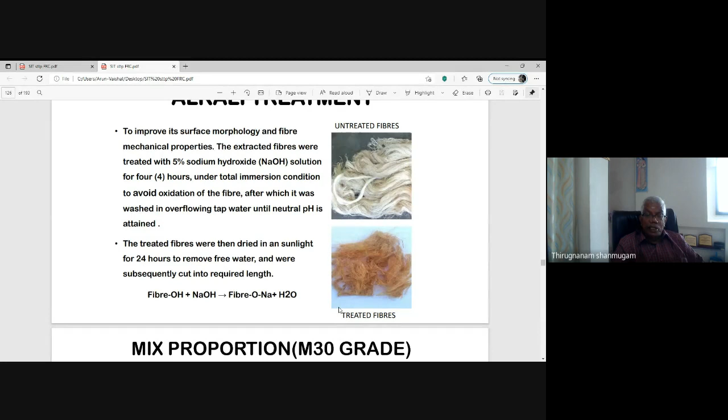But these fibers cannot be used as is; they have to be treated to improve surface morphology and mechanical properties. The extracted fibers were treated with 5% sodium hydroxide solution for 4 hours under total immersion to avoid oxidation, after which they were washed in overflowing tap water until neutral pH was obtained. The treated fibers were then dried in sunlight for 24 hours to remove free water and subsequently cut into required length. This is the view of the banana fibers.

The mix proportion adopted is M30 grade concrete.

This is done by using IS 10262 code of practice. The superplasticizer is used as 1.7 kg per meter cube, that is 0.5%, for 340 and 0.5%. The steel fiber initially 0, banana fiber is 0.5% by weight of cement. This is by volume of concrete by weight of cement. SFRC is 1% by volume of concrete, and HFRC is 1% and 0.5%. So banana fiber, steel fiber, and hybrid fiber.

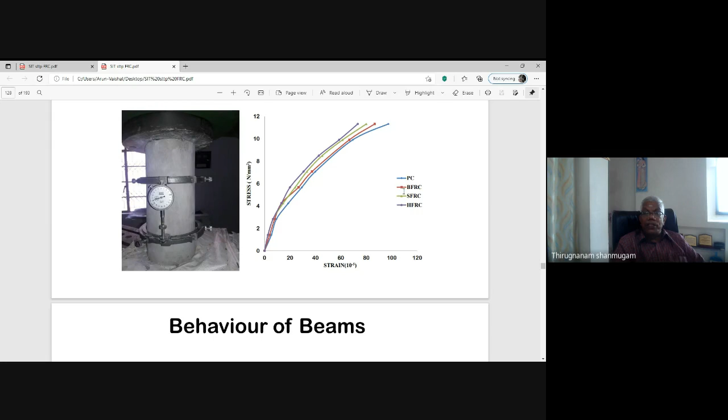So the stress strain behavior of the cylinders, concrete cylinder, FRC cylinder is like this. It gives the modulus of elasticity values, the beam testing. Here only the monotonic forward cyclic loading is adopted, not the reverse cyclic loading.

The load deflection behavior: load carrying capacity is 15 kilonewton as the first crack load for the RCC beam. When the fibers are added, 21 kilonewton, just a 50% increase in the load carrying capacity. Ultimate load 45 and 51, marginal increase, about 10% increase.

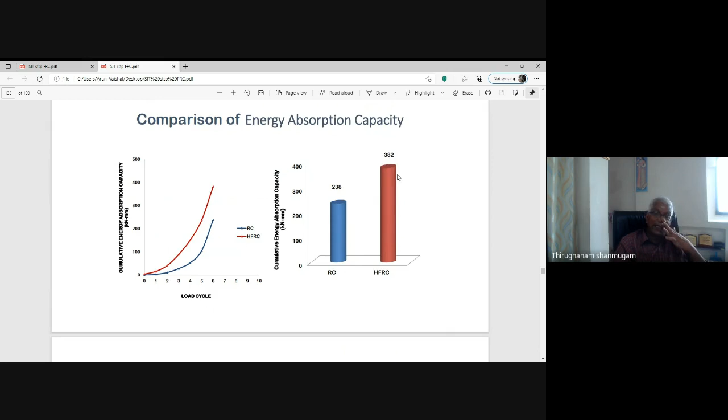Whereas the deflection is also increased very much, 18.5 mm, 20.6 mm, because at the inelastic stage the deflection is very high. Comparison of energy absorption capacity is 238 and 382. Considerable energy absorption capacity is available in HFRCB.

Similarly ductile factor 8 and 13, 50% increase in ductile factor is there. Stiffness degradation, both HFRC and RCC are exhibiting the similar type of stiffness degradation. You can notice here the vegetable fibers are having very low modulus, that is why we are not expecting sufficient amount of this stiffness.

Conclusion: there was 30% increase in compressive strength as a result of hybridization. Hybridization boosts the split tensile strength and flexure strength by 45% and 62% respectively. So increase in compressive strength is only 30%, whereas increase in flexure strength is 60%.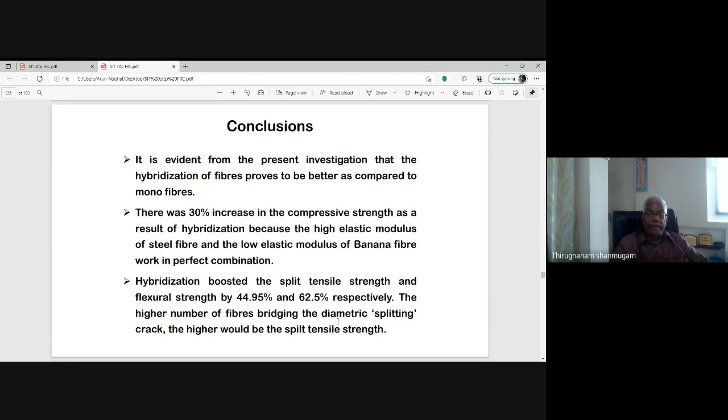These are the properties of the fiber: 25 mm length, diameter is 0.25 mm, aspect ratio 100, tensile strength is very low, 268 Newton per mm square, percentage elongation 15%, Young's modulus 42 gigapascal, density 1.7 gram per cc. So compressive strength 41 Newton per mm square, sisal fiber added gives 44 Newton per mm square.

Steel fiber gives 47 Newton per mm square. If these two are added, it results in higher compressive strength, 54 Newton per mm square, near about 30% increase in compressive strength.

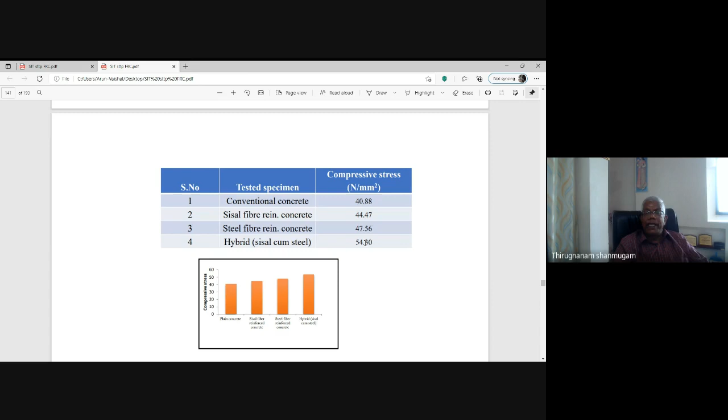Similarly, split tensile strength is 3.67 Newton per mm square and 5.52 Newton per mm square, near about 50% increase in split tensile strength. Similarly, the flexural tensile strength is 6 Newton per mm square for the plain concrete beam and 10 Newton per mm square for hybrid fiber reinforced concrete beam. 50% increase in flexural tensile strength is possible.

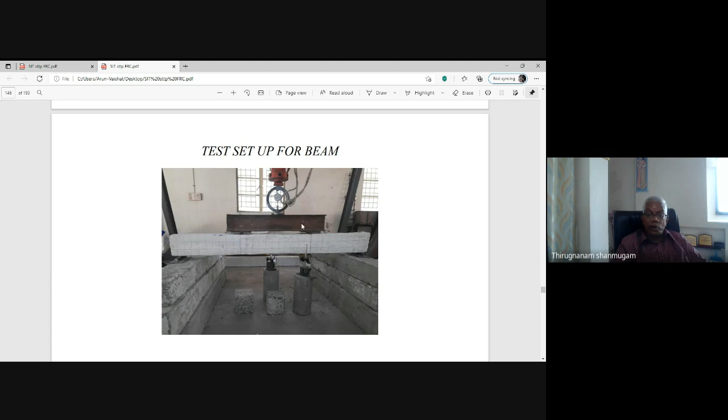Similarly, modulus of elasticity is also increased. RCC beams are cast and tested under the 2-point loading system. Load carrying capacity at crack load 15 kilonewton, 22 kilonewton, ultimate load 45 and 51 kilonewton.

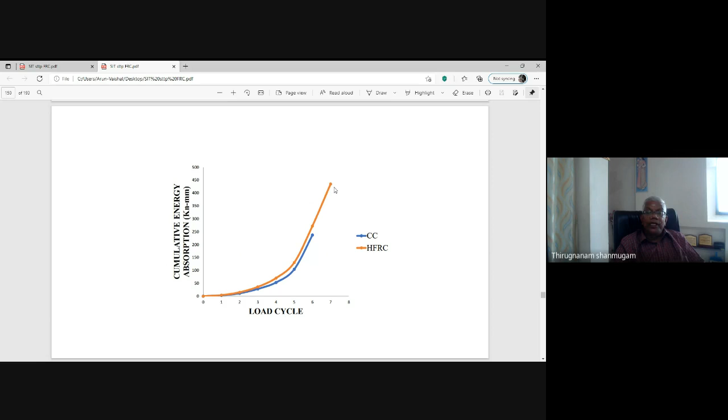Mode of failure is similar to this. In HFRC there are a number of cracks available, resulting in higher strength. Instead of adding a single type of fiber, the combination of different types of fiber, that is hybrid fibers, increases the ductility and energy absorption capacity substantially. This phenomenon is particularly advantageous in case of structures located in earthquake-prone zones.

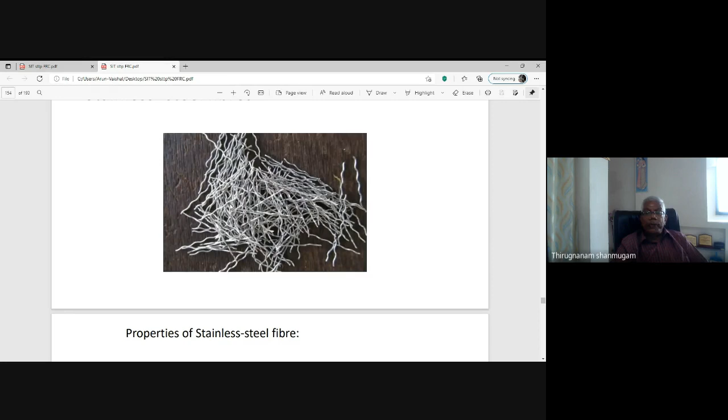Another experimental investigation uses stainless steel fibers to reduce the corrosion of the steel fibers. Stainless steel fibers are used instead of mild steel fibers to improve the durability of the fiber-reinforced concrete. These are the properties: yield strength and tensile strength are higher, 600 Newton per mm square.

Test results indicate that SSFRC increases compressive strength from 39 to 47, split tensile strength from 2.3 to 3.7, flexural strength from 3.8 to 5.4. Very much increase in strength properties.

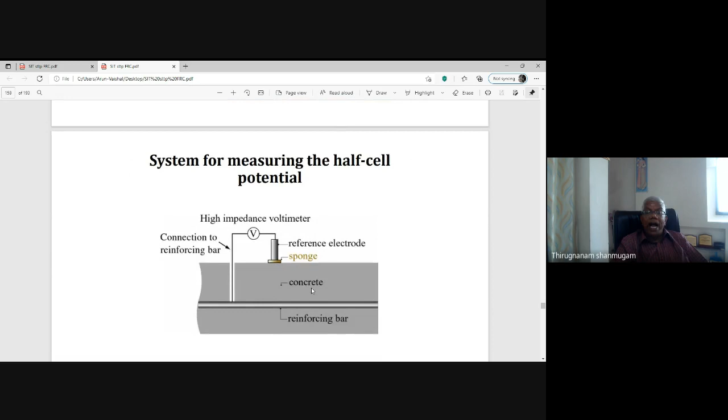These beams are subjected to an accelerated corrosion test setup, and this is the schematic diagram. And this is a half cell potentiometer for measuring the corrosion level.

This potential is tabulated like this. For the steel fiber reinforced concrete, 245 initial reading, and near about the same thing, 266. But at the later stage, at 140 hours, it exceeds the corrosion limit of minus 350 millivolts. Whereas here it is within the limit, minus 226, and it takes more time, at 190 hours it reaches the minus 350 demarcation point.

At that point it involves severe corrosion of these fibers. So at the end, this one is maintaining the same condition. The propagation is not taking place here, but in the other case the propagation leads to the failure of the structure, at 200 hours. This is the view of the specimens after corrosion.

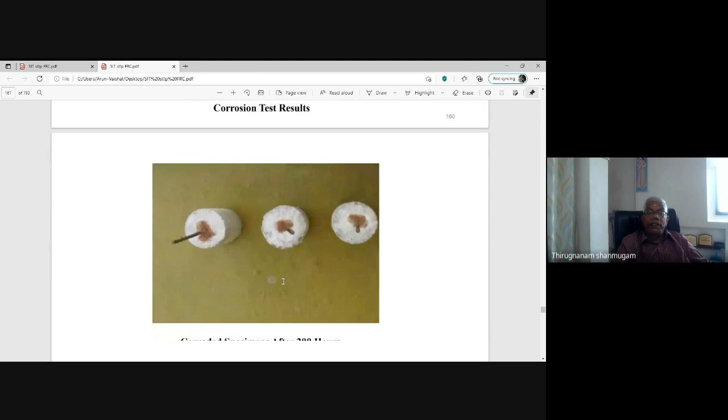So stainless steel fiber reinforced concrete is preferable. That is the result: load carrying capacity, energy absorption capacity, and ductility factor.

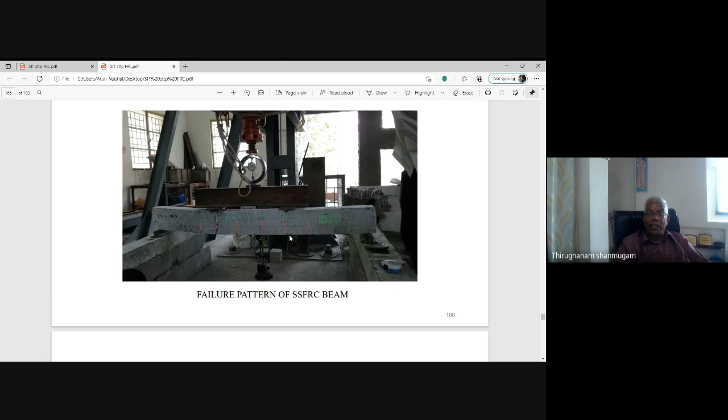The failure pattern of the stainless steel fiber reinforced concrete beam: the beams are subjected to reversible loading, so forward cracks, negative cracks, etc. Beam column joints are used for exhibiting the behavior, ductility factor, energy absorption capacity, mode of failure, etc. The beam plastic hinge is formed at the junction of the beam columns.

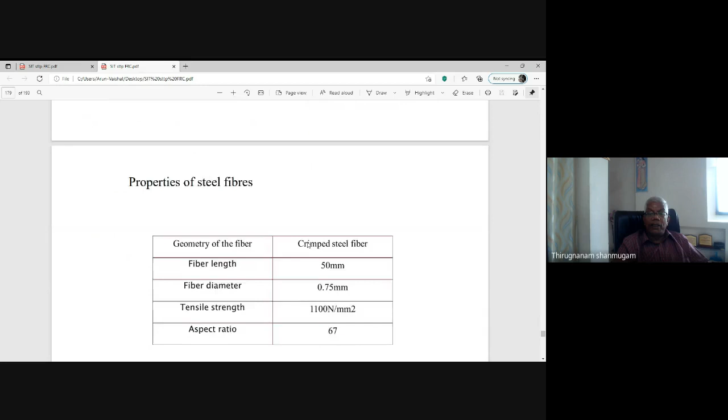The modulus of elasticity and tensile strength is a little bit higher, 1100 Newton per mm square. But the modulus is less, so against polypropylene it conforms to low, medium modulus fibers. Aspect ratio is 67.

This one is the steel fiber, crimped steel fiber, and this one is the polypropylene fiber. Only the tensile strength is 750, much less than steel fibers.

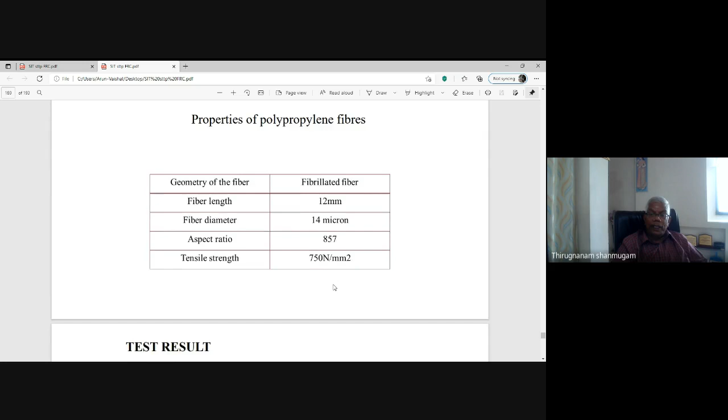The compressive strength is more or less 10% to 20% increase. Split tensile strength or flexural tensile strength is 50% increase. Loss of weight is a durability criteria. Loss of weight in acid attack, sulfate attack is very much less compared, nearly 50% less. So hybrid fiber reinforced concrete is much more resistant to acid attack.

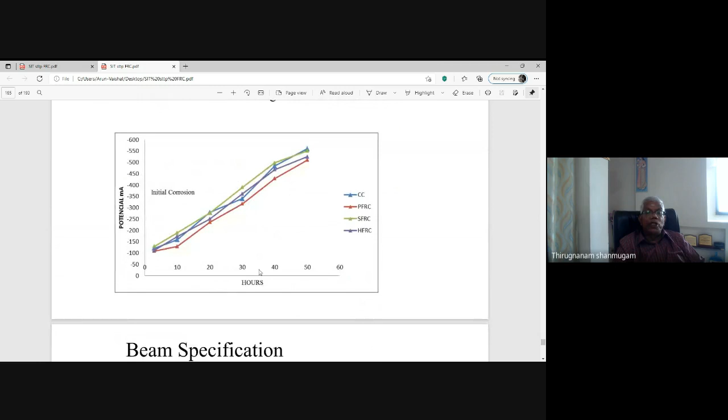Beam specifications: the volume fraction is 1% by volume and 0.2% by weight. The polypropylene has very low density and the number of fibers is very, very large, so only 0.2% is sufficient.

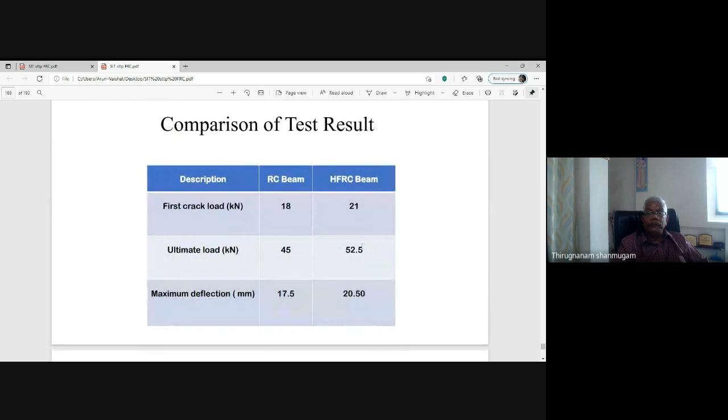So the conventional concrete beam is the first beam. You can notice the energy absorption capacity, first crack load, ultimate load, and maximum deflection. Comparison of ductile factor, energy absorption capacity, stiffness degradation, etc., is similar with the hybrid fiber reinforced concrete.

That is the end of our presentation.

The summary is, instead of adding steel fibers alone inside the fiber reinforced concrete beam, you can utilize the hybridization principle: low modulus fiber and high modulus fiber, long fiber and short fibers, macro fibers and micro fibers depending on the aspect ratio, metallic fiber and non-metallic fibers, synthetic fibers and organic fibers, vegetable fibers and metallic fibers. These combinations of hybrid fibers produce very good results in all aspects: strength, durability, structural behavior, ductility, energy absorption, stiffness, crack load carrying capacity, etc. Because of these superior properties, this fiber reinforced concrete beam can be applied in many applications.